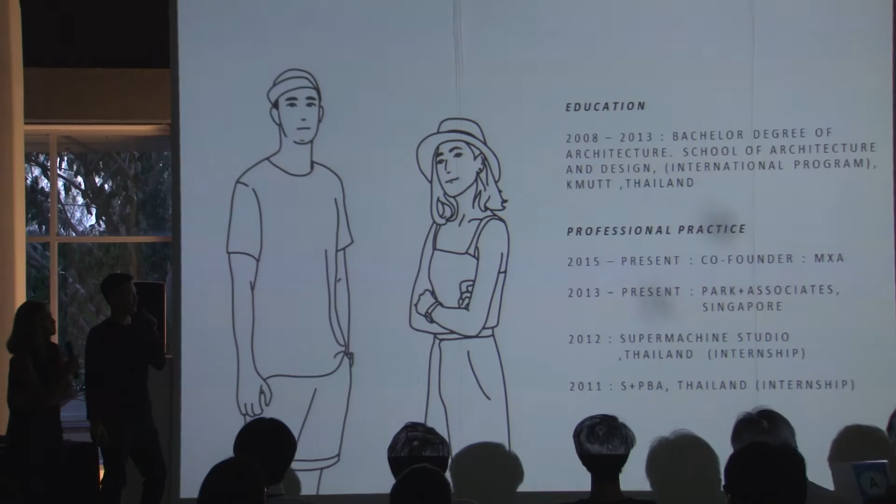There are two main topics that we're going to talk about. The first part is what we were doing when we were students, and the second part is after we graduated from the university. So for our professional experience, when we were third year students, we had a chance to do an internship at S+PBA, and when we were fourth year students, we also did an internship at the Supermachine Studio in Bangkok, Thailand. After we graduated from the university, we immediately started working in Singapore, which is an international environment.

We also had a chance to do various types of buildings, such as residential projects, commercial and mixed-use projects, master plans, and especially competition projects. This is our achievements while we were students. Since 2010, we won a lot of competitions and had some publications, in Thai magazines as well as international magazines and some books.

This is the story we would like to share about what we did in class at SoA+D before we got the job in Singapore. Every studio project has a goal and criteria that students need to achieve, so we set our goal to the highest standard. The result of each project was quite successful. For example, when we were third year students, there was a midterm project and an internal competition. I got the first prize, and we got the second prize of the studio project.

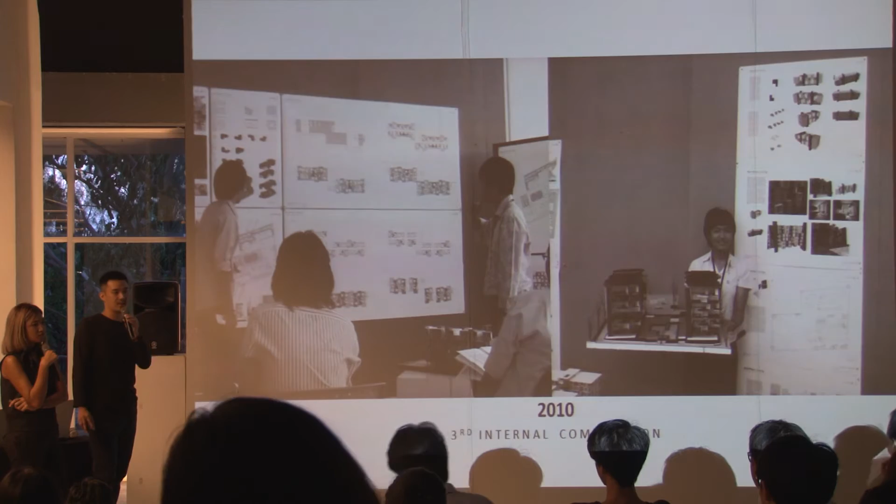After that we wanted to know what standard we were at, so we wanted to compare ourselves to other universities. We formed a team to do competitions, not just me and Mix, but P Boom as well, the three of us, doing competitions after class. We always thought, if we are top students in the class, how about students at other universities? What is the standard? The only way we could prove it was to do competitions.

So we think beyond that. Competition is the way we meet other people outside the university, so it opened up the opportunity to see other works. Most of my friends said the studio project is very hard work with no time. But during this period, after class, we also formed the team to do competitions, meaning we had no weekends and no school breaks as well.

We started with the Green Innovative House competition, organized by B1 magazine. This competition is a student competition. We needed to think about how to create a green innovative house in a different way, instead of only designing a green roof and planting trees and saying it's green. We didn't want to do it that way; we wanted to explore another direction. This is the first inspiration: the relation between two biological species, a buffalo and a bird. We wanted to capture this kind of relation and adapt it to our design.

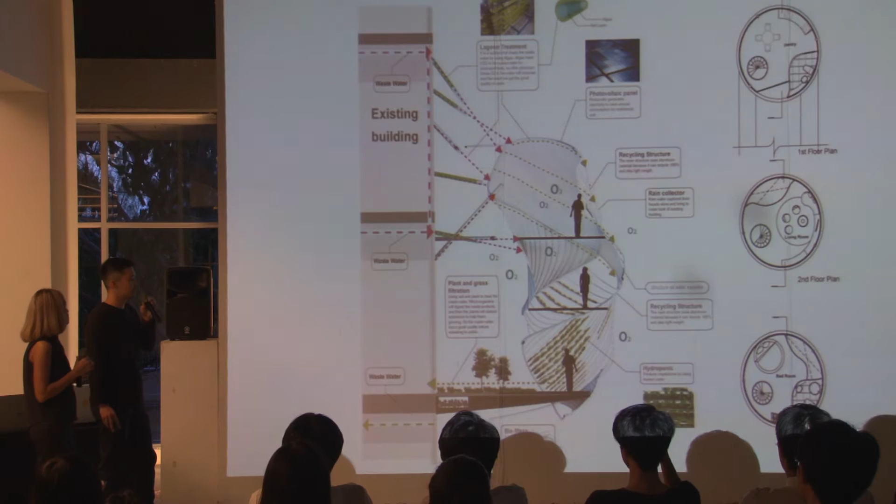Then as you can see, based on our research, in the urban scale, one unit of our design can treat about 500 liters of water per day, and also produce oxygen. So if we have 100 units, we can achieve water treatment of about 50,000 liters per day. So this is the urban scale, and this is our outcome.

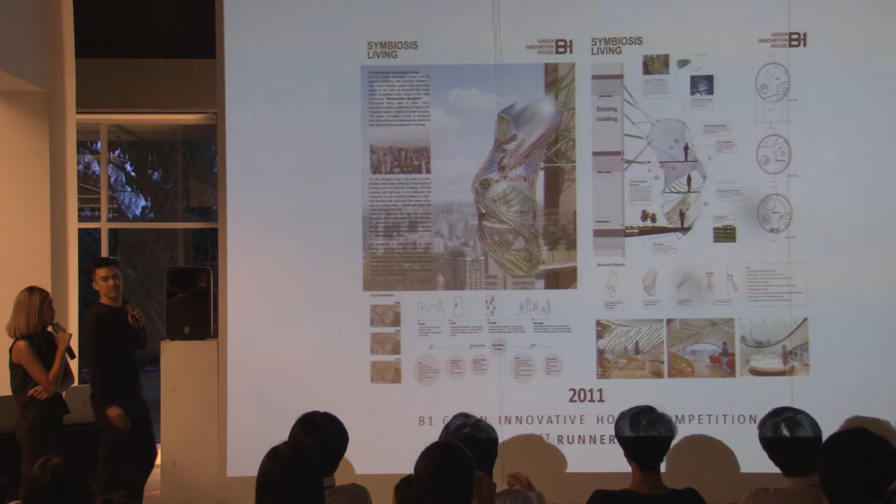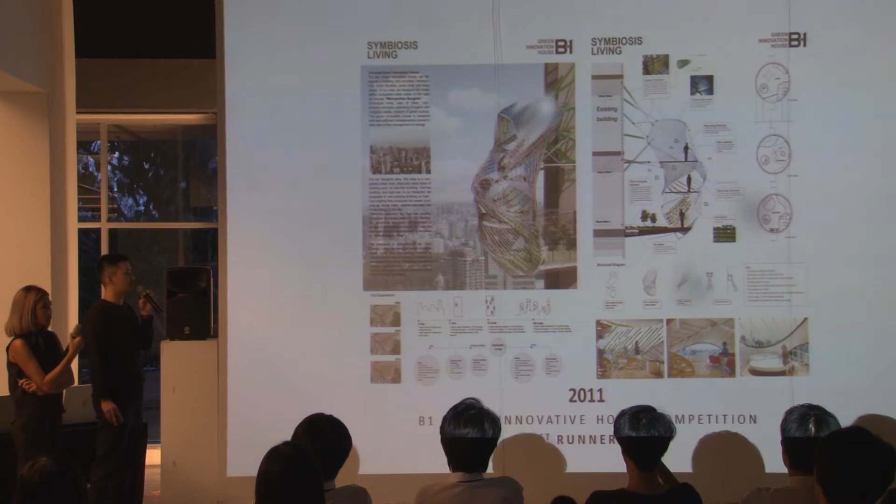This is the final project we did when we were third year students. You can see this is the final presentation that we submitted, and we got the first runner-up for this competition. This competition is kind of like a small step that really motivated us to develop ourselves.

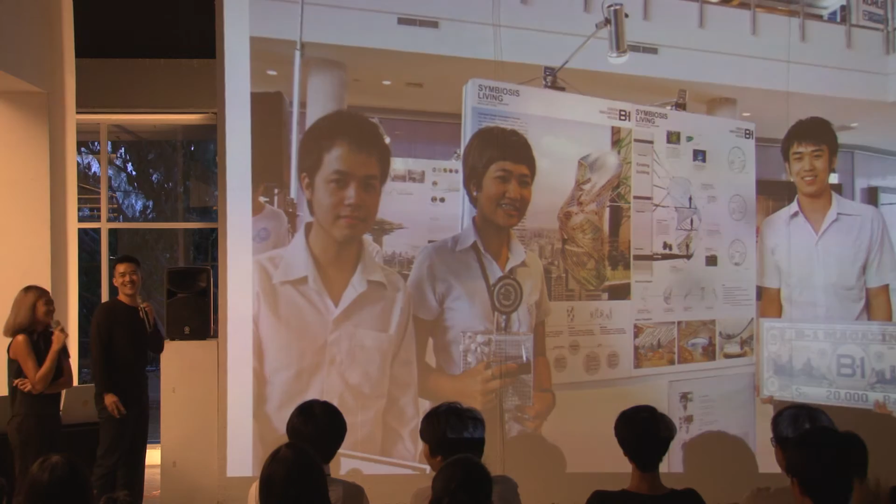Then the next step, we tried to join an open competition, which means it's not only for students. As you know, there is the flood crisis in Thailand. The topic is about how to live with unstable delta conditions. So this is the starting point.

We tried to study the mangrove structure and how the mangrove roots adapt to the unstable water level. So we tried to use this kind of structure to develop our own structure with the whole system of the community scale. We not only studied the structure, but the ecological system as well. And we also did massing models to test our structure and think about the unit.

So this is the outcome of the whole community scale. This is the linkage between the hubs of the system, so the circulation of each unit will not fail, and they connect together. As you can see, during the flooding crisis the circulation is disconnected. So we try to maintain it as much as possible by creating new circulation to connect all of the community and keep the character of the city.

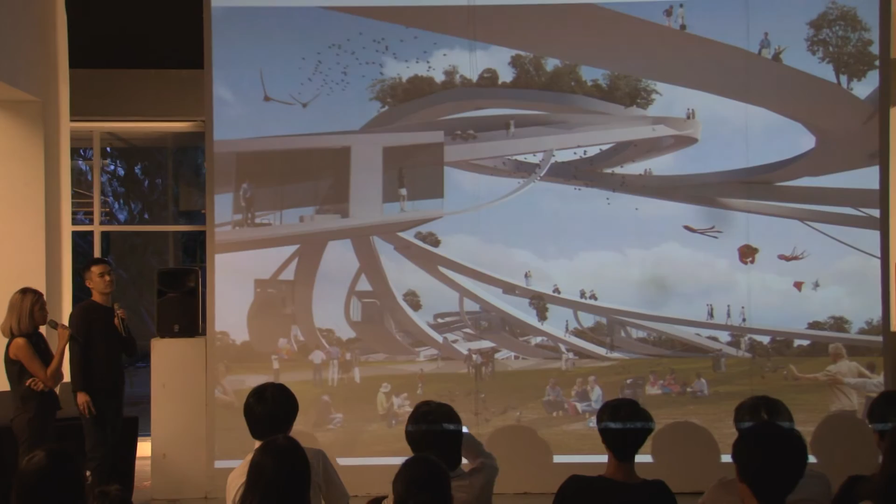So this is the normal situation. People can use the space under the whole structure as a public space, and after the flood comes, the whole activity is still there. The connection will not go away. And when the floods come again, you can see the activity. We try to maintain all the circulation and activity, so the structure can be like a pier, meaning by boat we can keep the circulation.

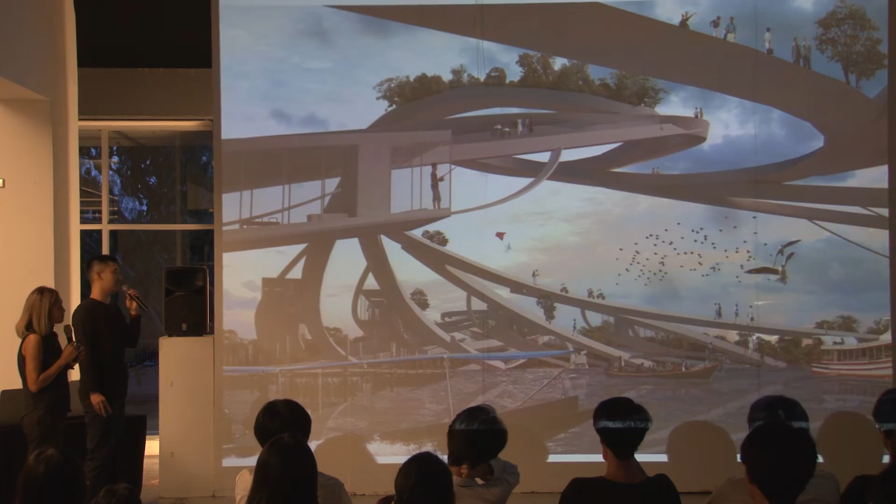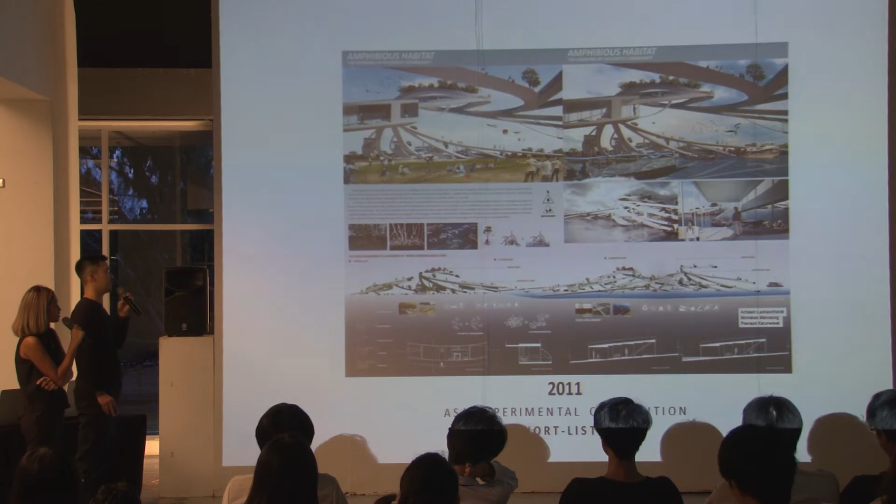This is the final presentation, and this one got shortlisted this year. This is the way we installed our work in the ASA exhibition. So this is the rest of the competitions we spent time on during our study. Some we did not succeed in and did not get a prize, but we got a lot of experience doing the competitions.

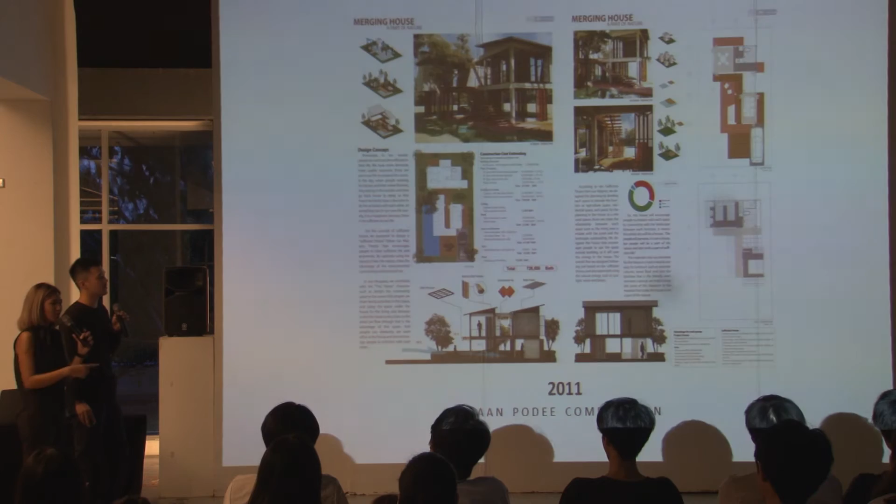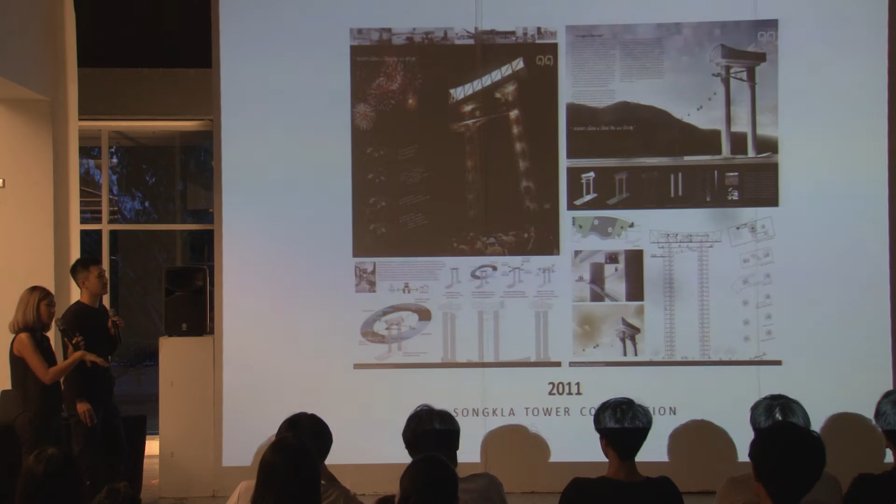This is the Baan Podee competition. We got only 5 days for this whole project. And this is more of a professional scale, because whoever wins this project can build the design. And this is another year of the ASA experimental exhibition, and more open, for the international competition.

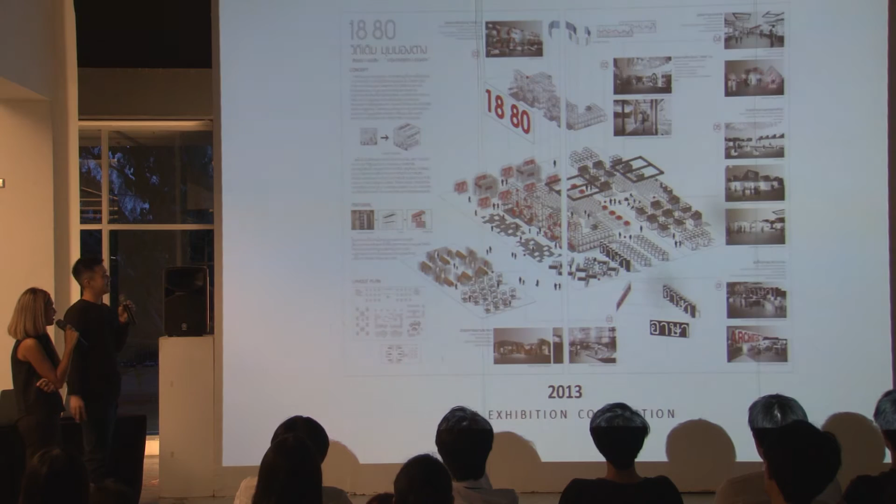We joined the Evolo Skyscraper competition. We needed to pay money to join, but we tried, while doing the thesis. Yes. And this one is the ASA exhibition, but there was no judging that year.

And then this is the overall achievement. Some of our work was published in Thai magazines, and some was published internationally, in a book and magazines from Canada and Korea. So it really motivated us. So that is our first edition.

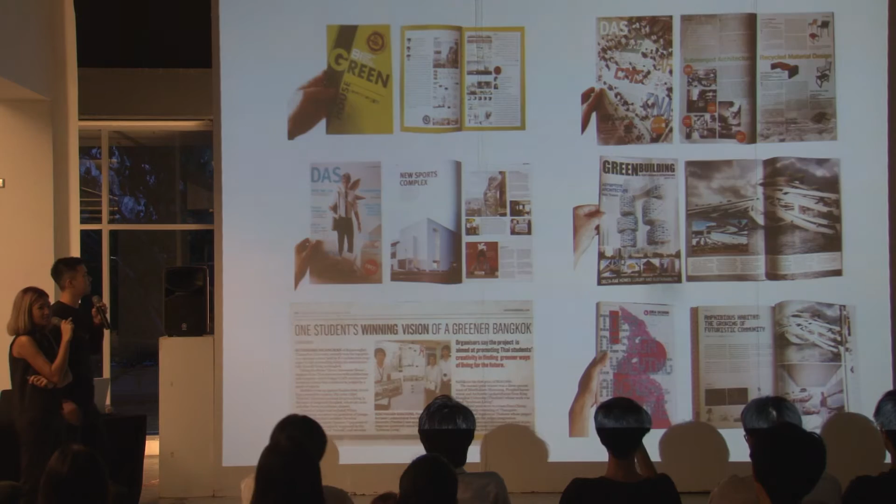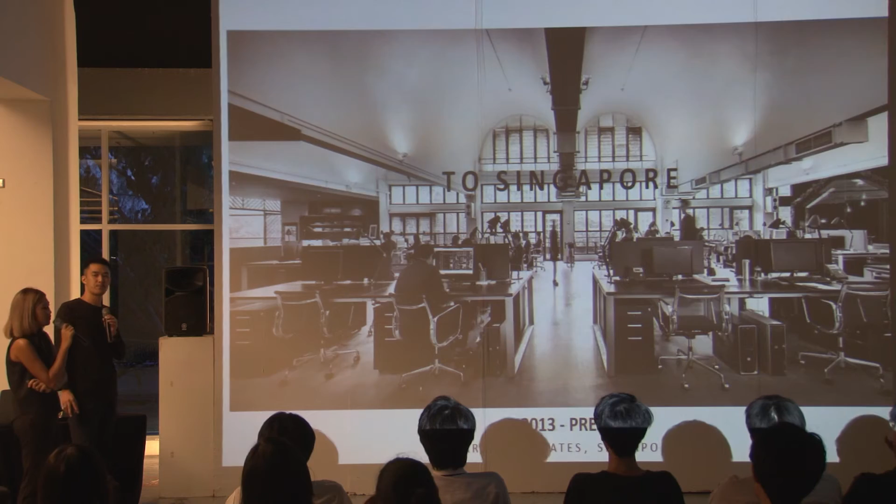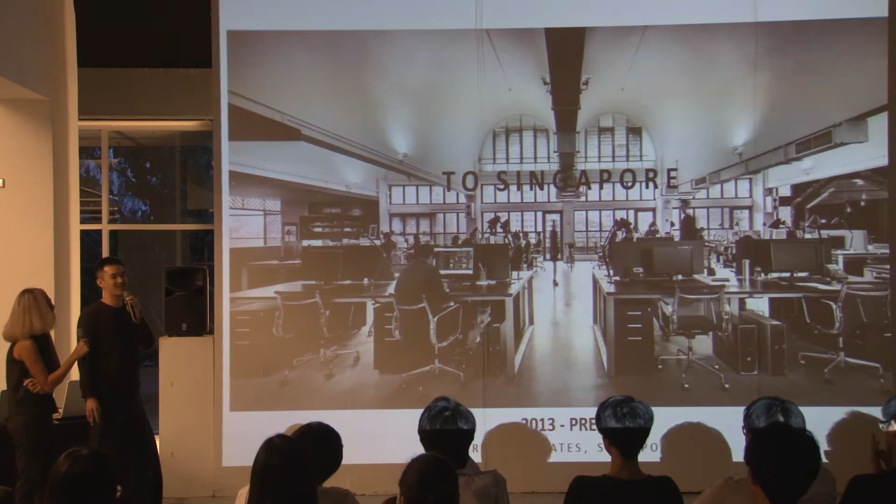So after we graduated, we got a job in Singapore. Actually, we sent the portfolio during the thesis. Our portfolio, we were the only ones who printed and sent a hard copy. And we got a job in the same firm. Yeah, really lucky, internship, yes, same firm. So we work at Park Associates since

2013 until now. And then it's kind of a big change, because you need to learn again. It's like being a first year student again after you graduated. Everything is new for us. This project is the first project I had the chance to do. It's a semi-detached house.

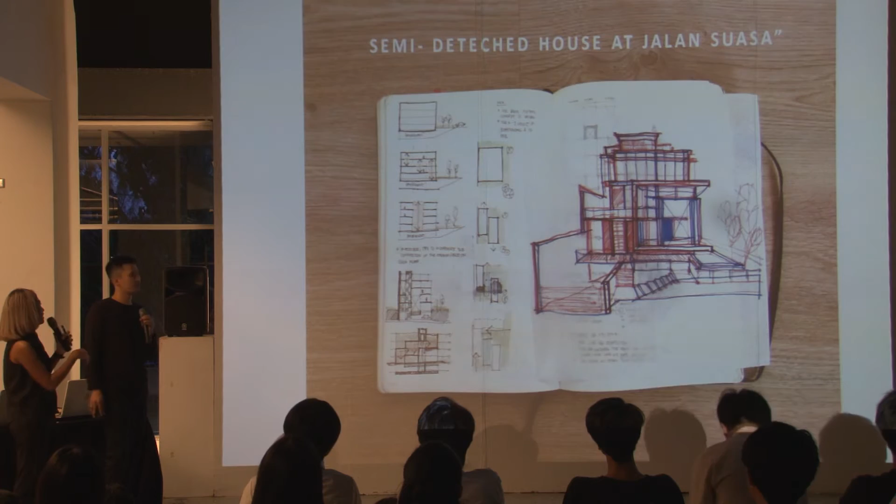Generally the semi-detached is like a twin house. You might share one wall together with the neighbor. So the brief from the client was they don't want this house to look like a semi-detached house. So the idea is we might try to make the house more detached from the wall. So I try to insert the green space between the wall and the main house.

And because the client is a really big family, I would like to create a common space where everyone in the house can gather together. So it allows me to create a living space that has a double volume, and at the same time the living space can interact with the swimming pool as well as the dining area. So it's not only expressed in the form, but the plan as well.

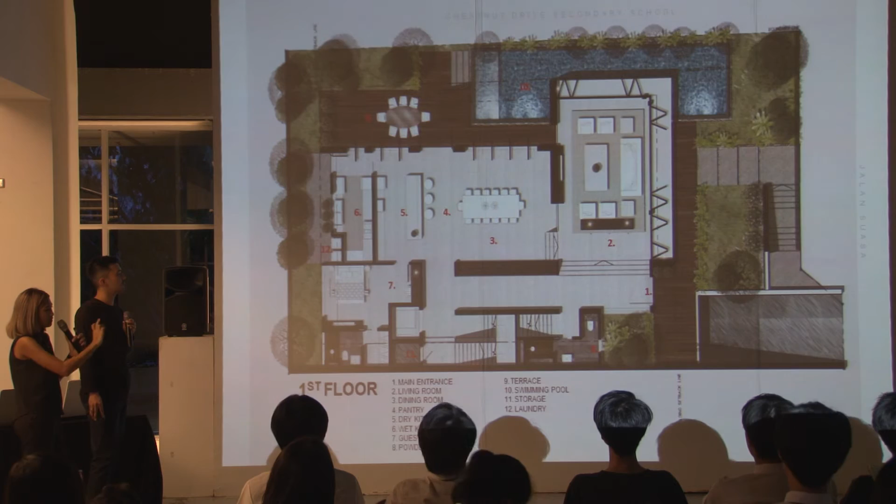So this one is thinking about the relationship between the function inside as well as the experience when you enter the house. You don't just go directly into the house, but you might walk through the garden first. And because the living room stands out from the plan, it gives more meaning to how you express the common area that is very important in the house.

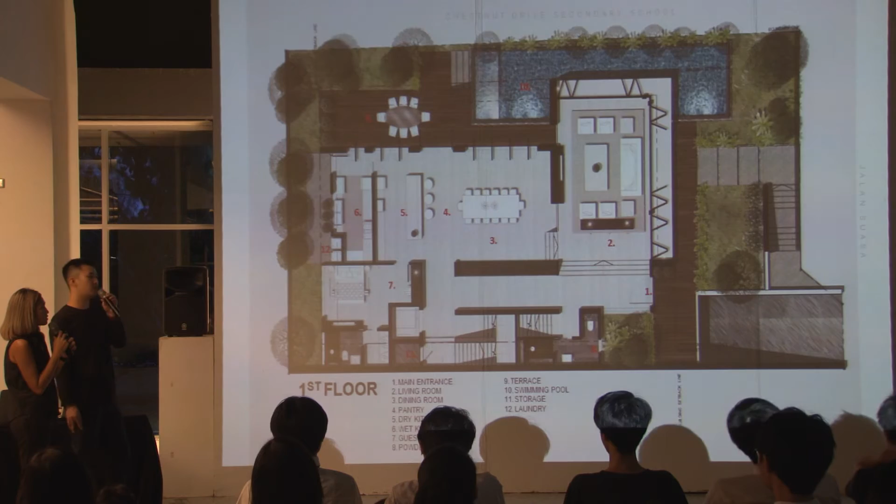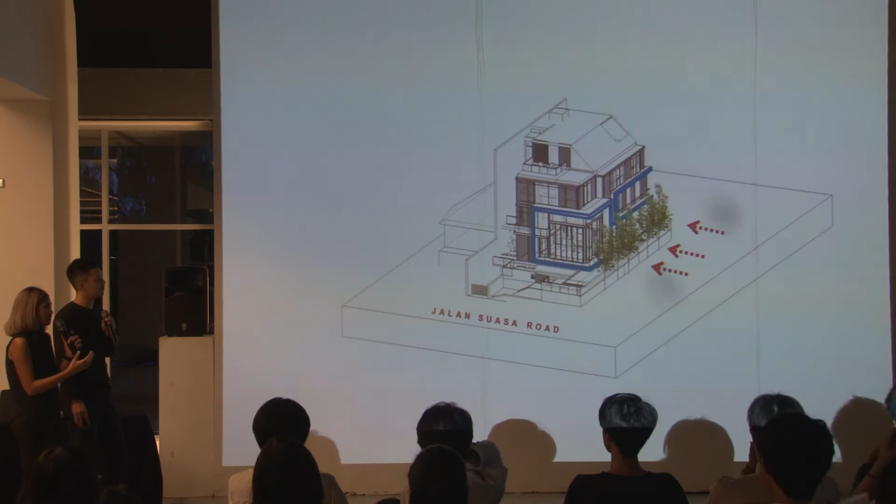And also the circulation, as you see, if you don't want to walk past the living or dining, you can go directly to the staircase to go to your bedroom directly. And this is a diagram that shows how I locate the living space facing north. And because to the north there is the school with the neighbor, you might keep the privacy with some trees for the clients.

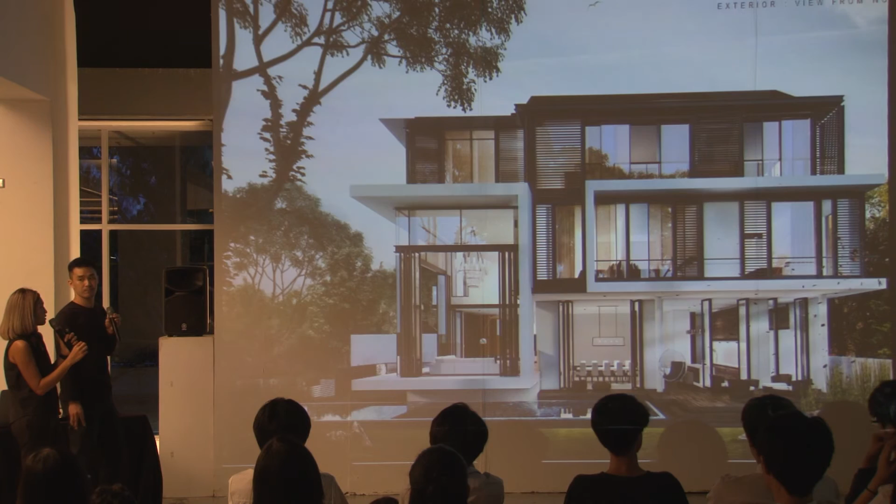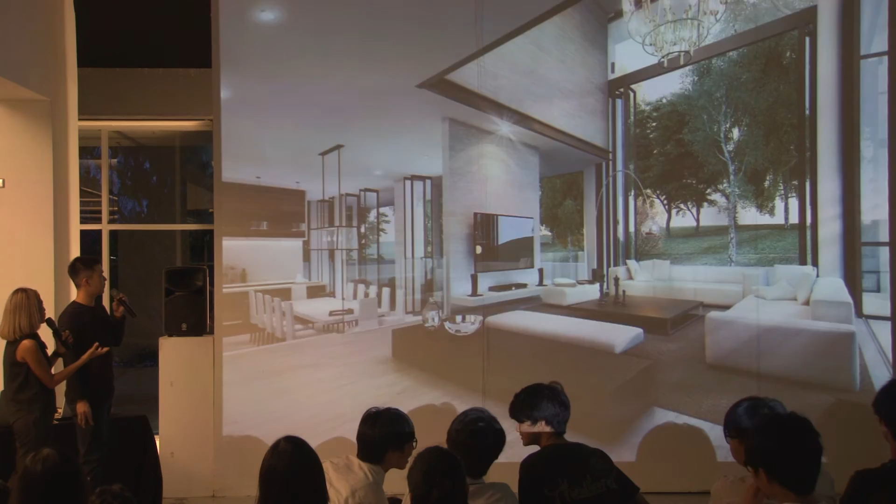And this is the elevation for the site. This is the perspective from the main road to the house. And this one is the actual site. It's built up and will be complete next month. This one shows the living space related to the dining area as well as the swimming pool down there. And for the actual space, it's quite the same as what you thought before the design was built.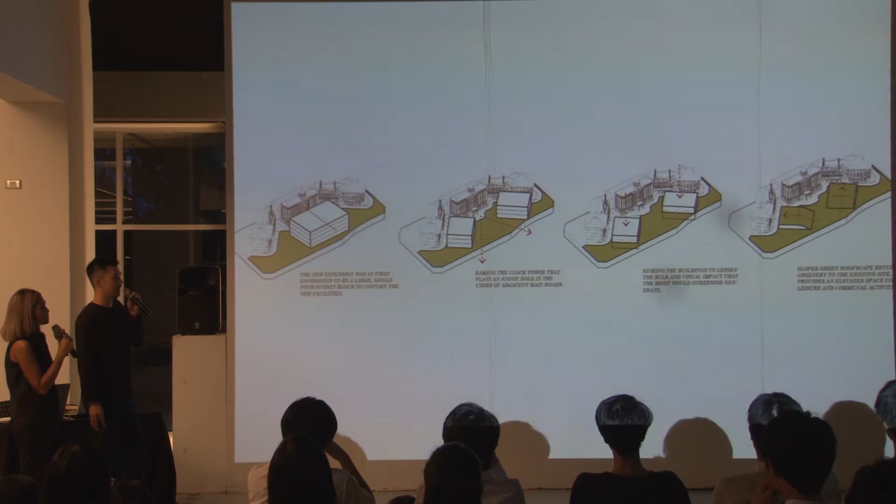So we don't follow their brief. We try to separate it into two blocks to reduce the mass, and then we sink it down one and a half stories into the ground, and then try to continue the existing green onto our green roof. Meaning we can keep the activity and also achieve the visual perception.

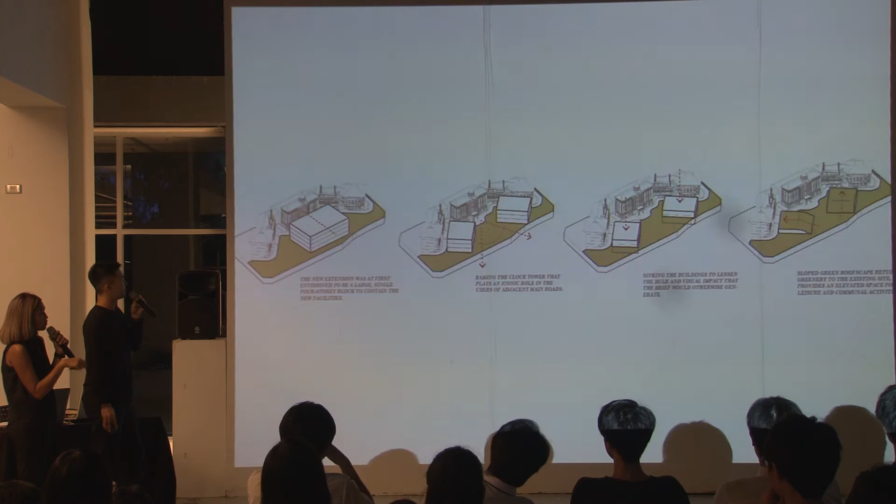This project was quite challenging for our firm because our boss dared to send this scheme to the client even though it doesn't follow the brief 100%. Normally we would not send this schematic design to the client because it's not what they want, but we proposed a new way. Finally, we won this competition because we were the only one different from the others.

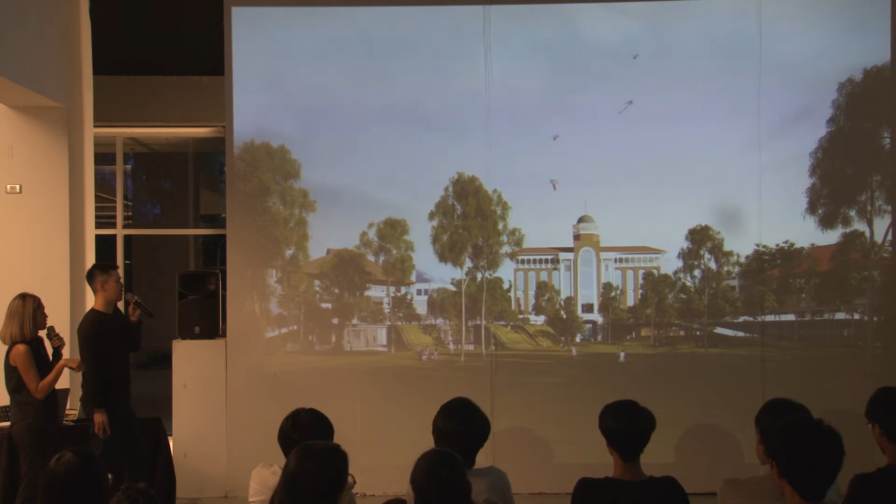Then we try to sketch to see the relation, and when you see from the roof plan, it's completely clean, the same as the existing one. And in terms of the visual perception, people can obviously see the existing behind, because we need to respect the site. Just a small change in size.

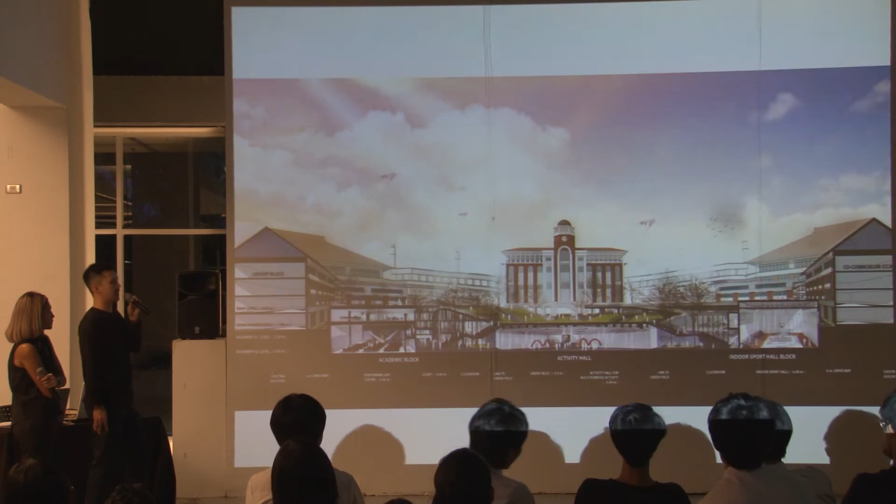So this is the facade design. We designed louvers here for ventilation, which is quite important because we sank down the whole building, so the air needs to go down through. And then you see the relation between the existing and the new one.

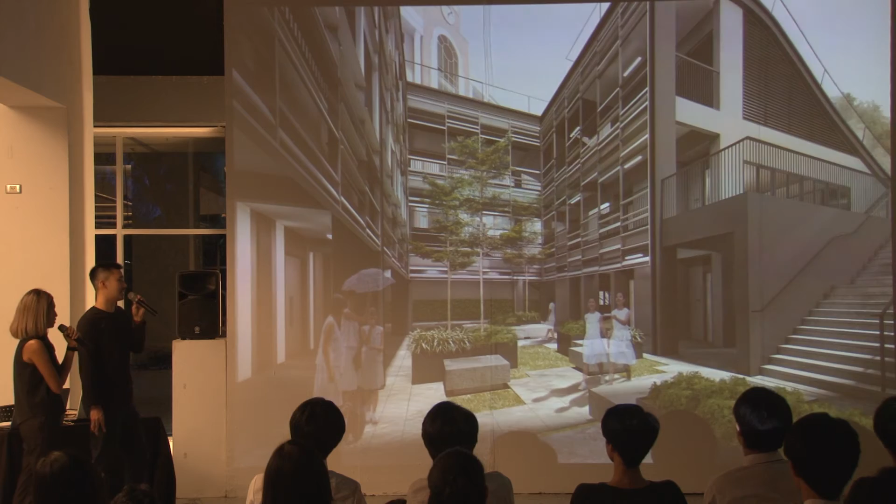And this is the center court. So we tried to create a court to allow the lighting, the sunlight, to come into the court. And it's almost finished by the end of this year.

Yeah. So as you see our development, at first when we were students, the competition was more very conceptual and unbuilt for sure. They don't want to build, it's just an idea competition. But in reality, when you do the competition and then you win, you need to build it, and try to keep the concept that you think of.

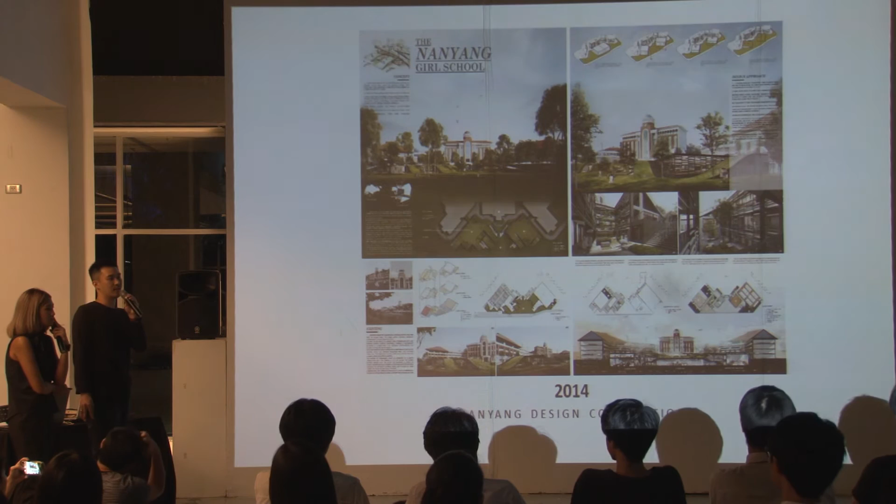Yeah. Personally, I think this project changed our firm quite a lot, because normally our firm is focused on safe schemes, formal ones and more commercial. But this one changed the vision of the firm. This is the final presentation board. We submitted only A1, two boards only, for the first stage.

This is another house, but it's a different type from the first house I presented before. This one is a Good Class Bungalow, which is the biggest type of house in Singapore. The client just gave a little of the brief to us, so the boss allowed me to experiment a lot in terms of the programming of the house. So I tried to bring a new method of thinking about the space inside.

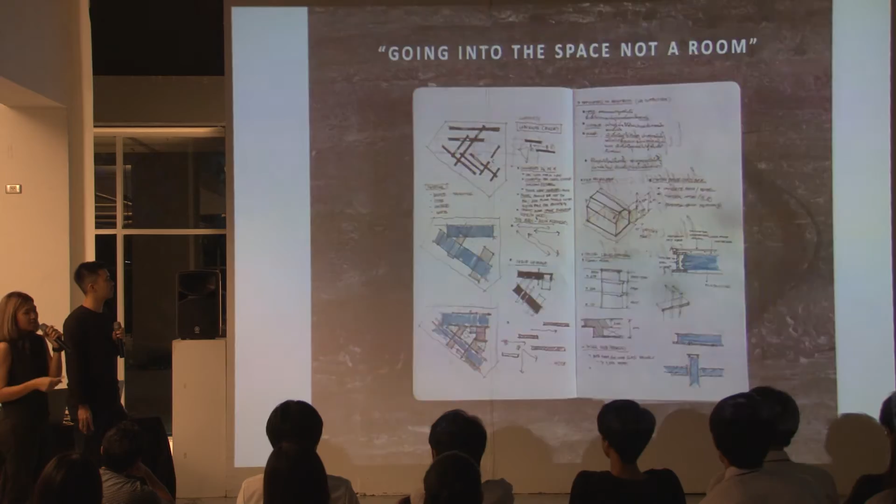Normally when you're doing a house, right, you do the box and represent this box to be the living room, the dining room, something like that, right? But this one, I thought the other way. This is the existing site, which is the corner. So I tried to think about the sequence. You walk through the house first, and then divide the main massing into two sides, the back one and the front one here.

And I created all the space only by walls, like partition walls, not boxes. So the box is just the outline. Then we inserted partition walls to create visual perception, because some of the programs need more privacy. That's the good condition of how we build the wall like this. The wall can hide some parts and show in other directions. So you hide something if you don't want to see it, but you show a lot if you want to focus.

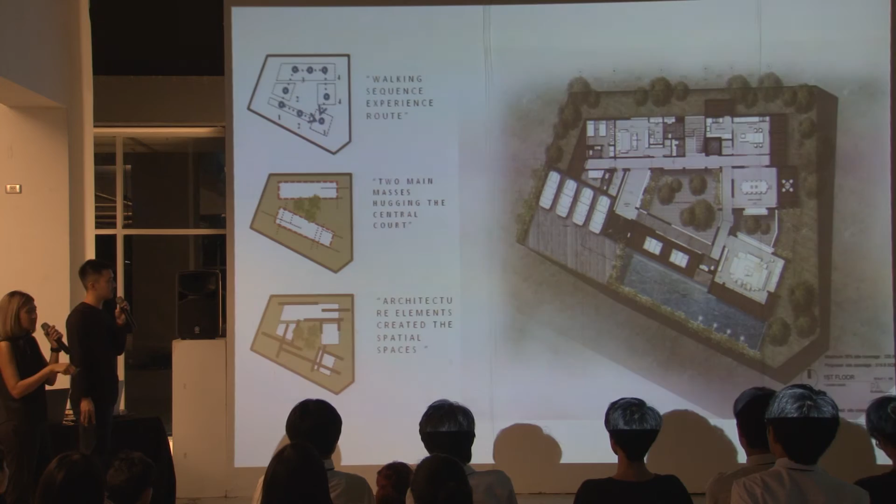Yeah, this is the relationship through the sections. The heart of the project is the court at the center, and this court changes the experience when you walk from one space to another across this garden. And you can see the space is, we can say, semi-outdoor. You cannot tell whether this one is inside or outside.

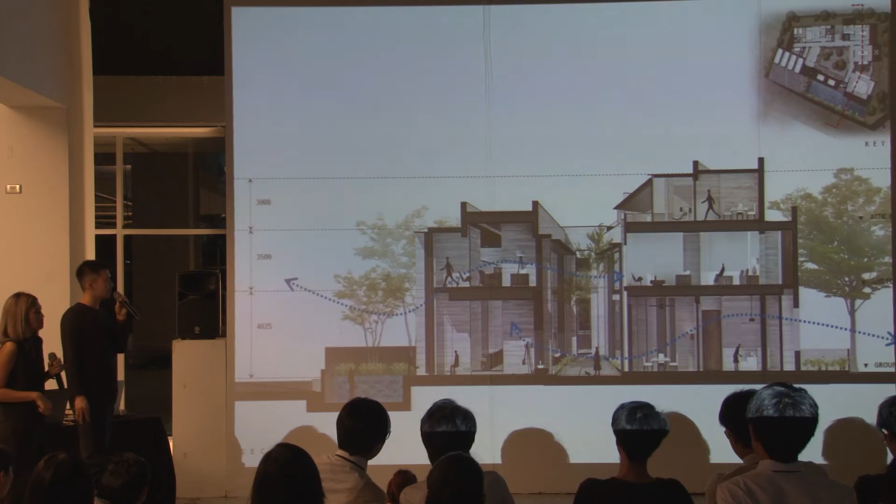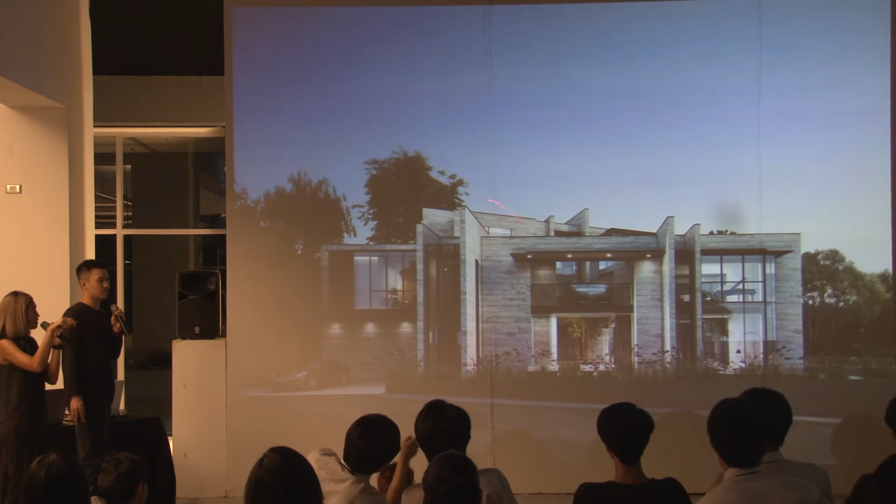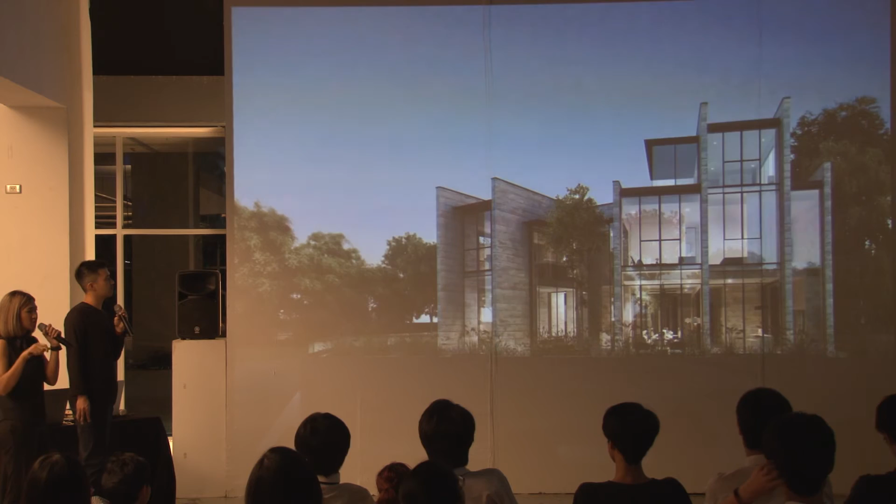This is the final presentation. So this one is almost inside already, but actually it's open wide to the outside. And we keep some privacy with another wall here. So the client was quite happy with the solution. So totally no more boxes for the house, just planes. And this is a perspective from the internal court and the linkage between the two blocks, the front and the back. Also, this one is open-air space.

And I like this photo so much because this one is almost exterior, but it's the main circulation where you walk from the entrance here to the living room. So you walk through the garden first.

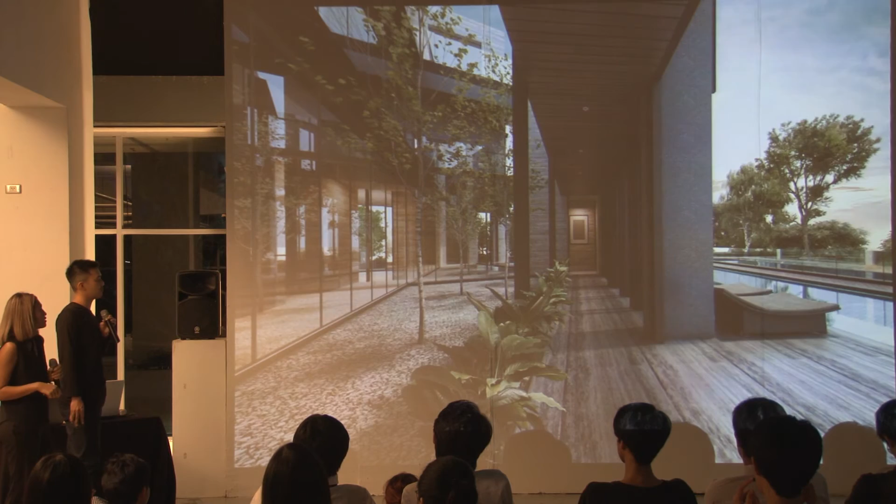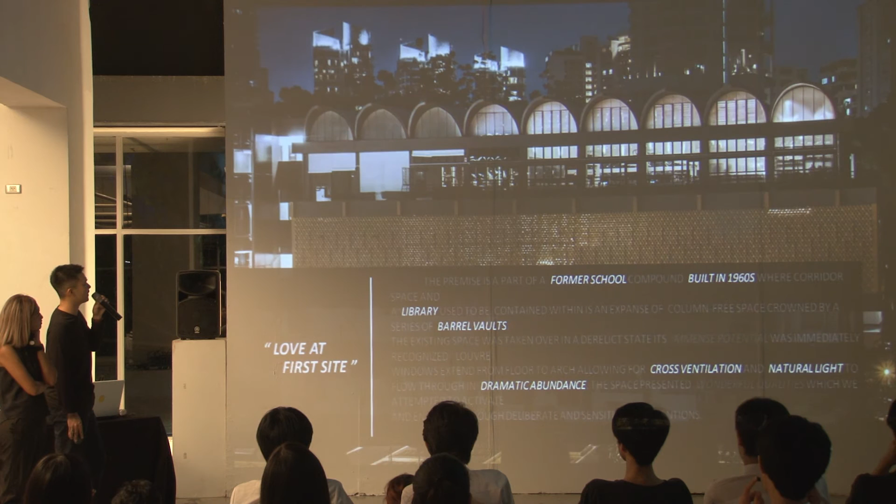And then another one is our office in Singapore. Yes, our office. So basically the existing site is a school, and our space is on the top of the building. As you can see, there is a barrel vault, something like an arch inside to take a long span. So our space has no column at the center. Then, this one used to be the library before.

And you can see the condition of the site. Then the idea: we don't want to create a boring office that separates people to work individually, with no connection, no interaction between each other. So the existing one is in the above image, and our design is the below one.

As you can see, the main entrance on the left is a triple volume, and then we close it at the transition space. Here is the cafe, the multi-purpose area, and our working space is a double volume space. So we try to create a dynamic sequence from this space, walking through this and going to another one.

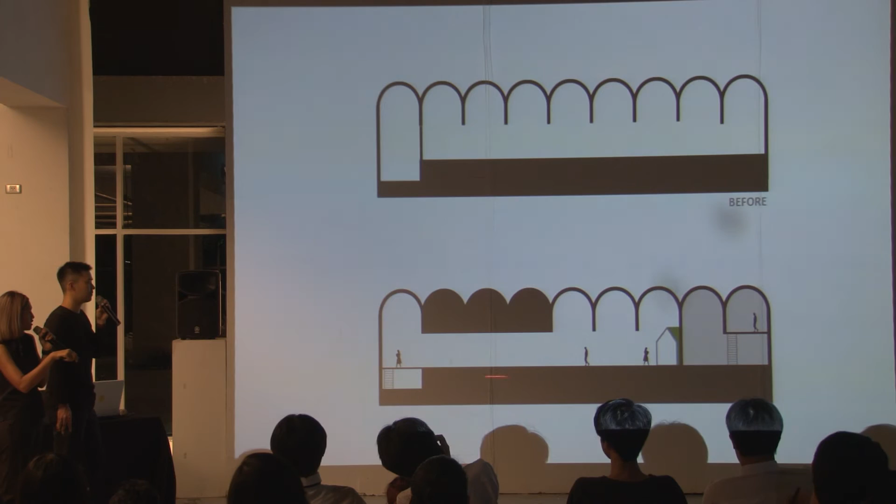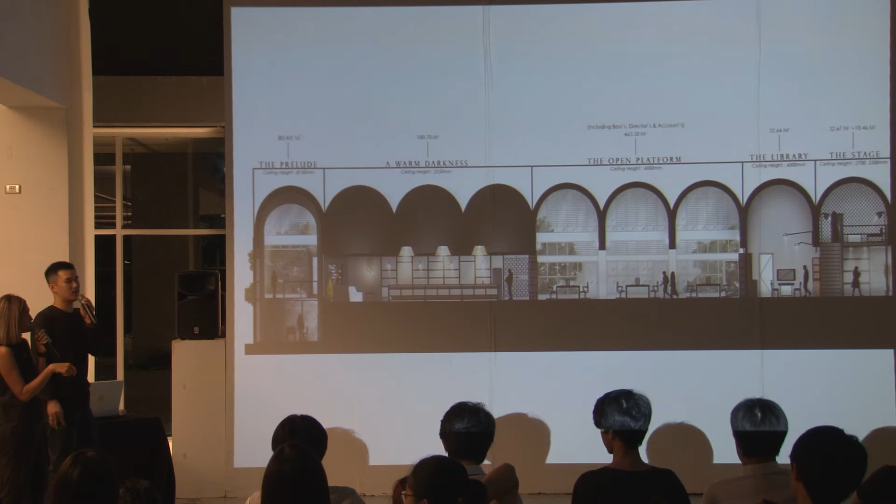Then this is the final section. You can see we try to create a sense of arrival by creating the triple volume here, and then you need to walk past the cafe, a relaxed space, before you work. So we try to create a sequence and a story. On the plan there are two entrances, here and here, but with both of them people have to walk past the cafe before they go to their desk or table.

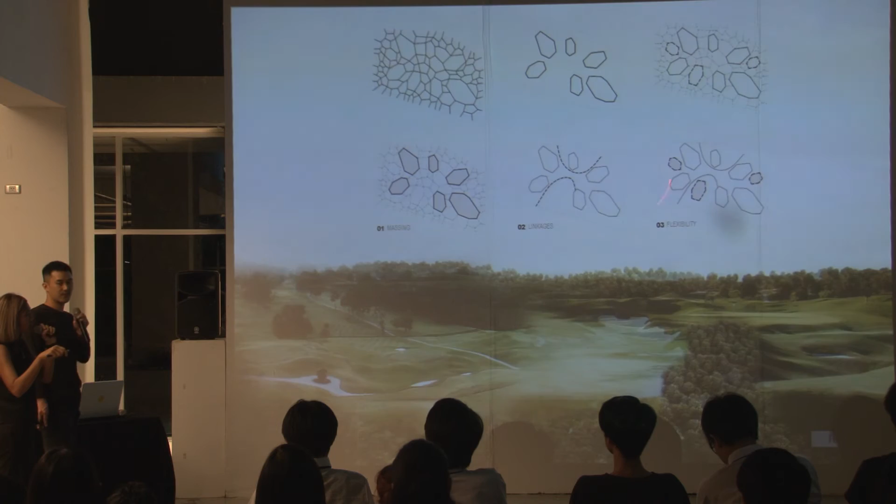This is quite a big project for our firm. We intended to join this competition for SICC, Singapore Island Country Club, doing the clubhouse. This one comes from the Voronoi structure, which can continue going and cannot stop. So we try to adapt this idea to create individual pods, and after that we link every pod together with this linkage. So if the client wants to expand the project, they can use the same Voronoi language. So it's quite flexible.

So this is the final outcome of the design solutions for the clubhouse. The north part faces the golf field, and the south part faces the forest. So we would like to block the existing building at 90 degrees here, and open the rest wide to the forest. So the direction of the plot has meaning. That's why they face this side.

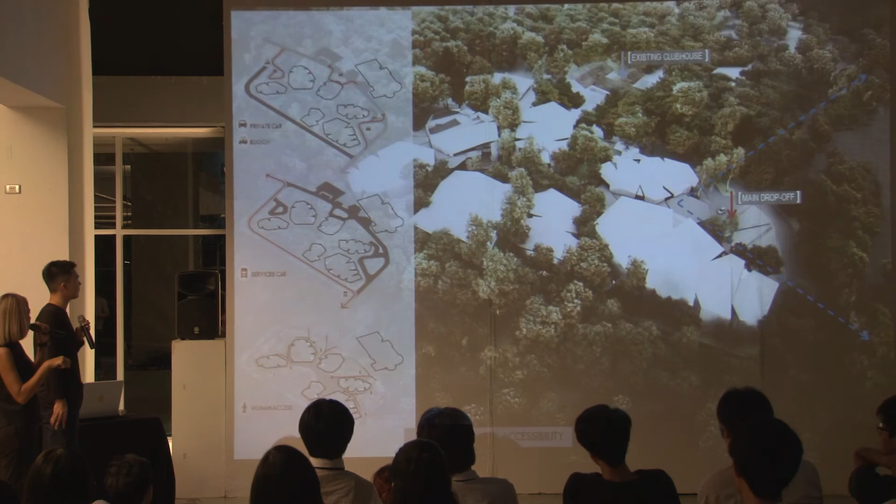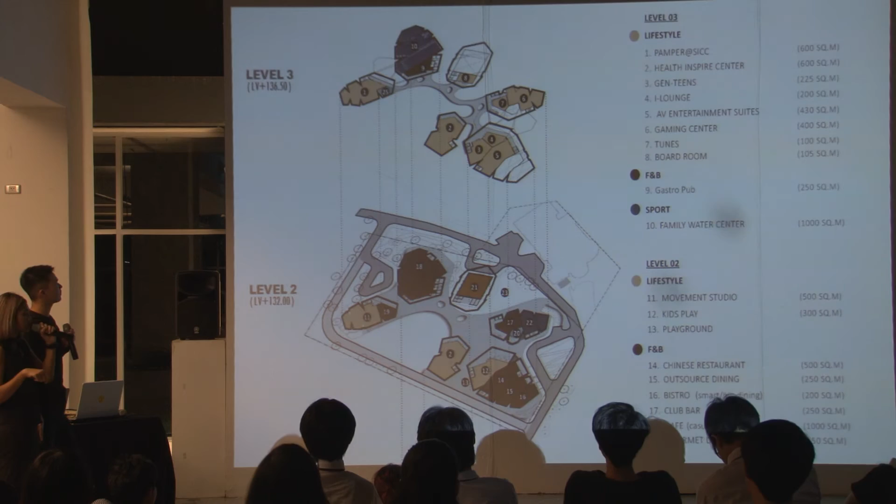And this is the circulation of the whole project. This is the main entrance, which faces the golf field here. They have 2 drop-offs, private car and buggy drop-off. This direction is the service car road here, and this is for pedestrians. This is the zoning plan. We have 4 stories, including the basement. The basement is here.

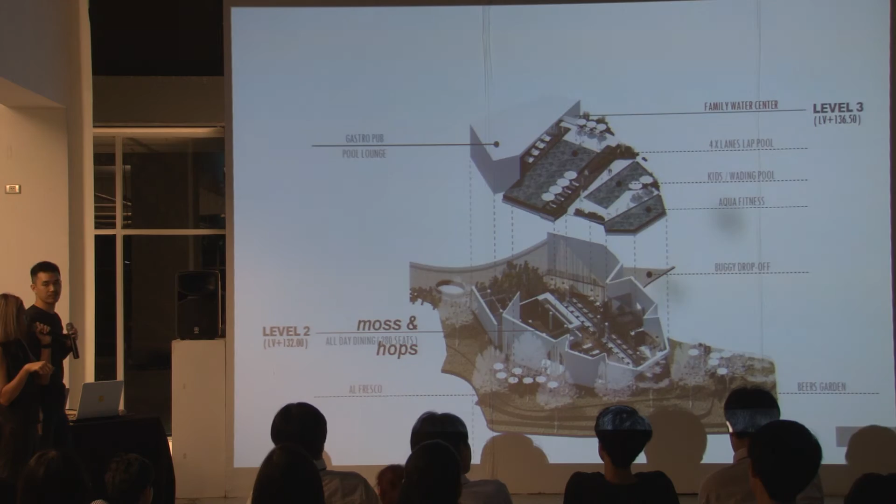And this one shows one of the individual pods, the relationship between the functions: the swimming pool, which is used all the time, we try to keep together with the all-day dining area. And underneath there are the service rooms, which are the locker room and the restroom, and the car park below.

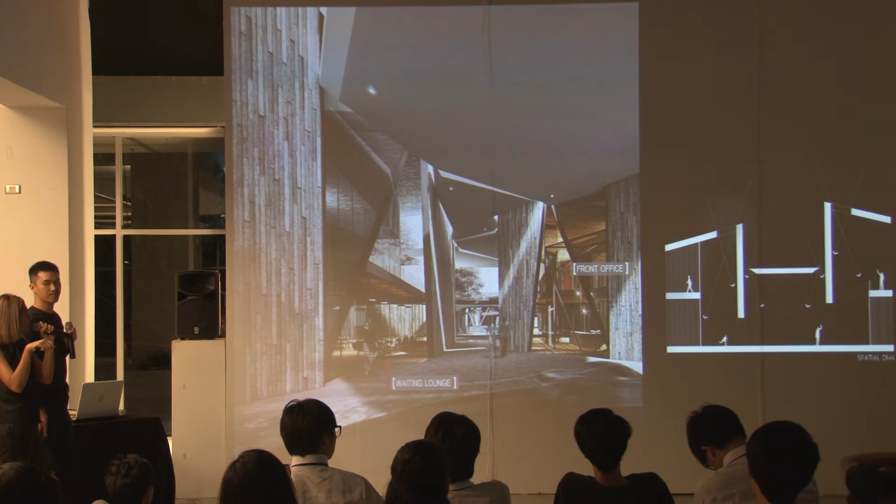And this is the relationship between the spaces, semi-outdoor and indoor, and the circulation, the double volume. This is the main entrance, so we allow some natural light to come down. And this shows the elevations. Sorry.

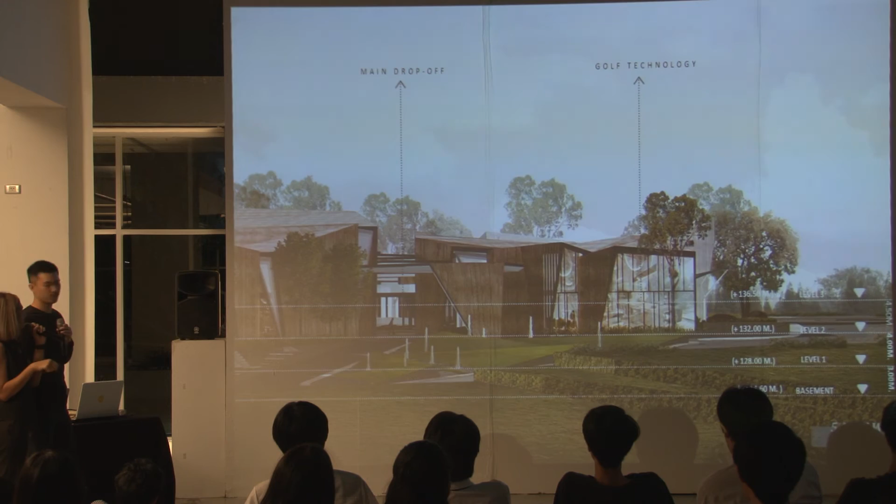Okay. Next one. There's a video to show you. This is the final presentation video to the clients. Because the project serves high-end people, it's quite expensive.

We spent 1 month designing this project, and another 3 weeks doing all the productions for the presentations.

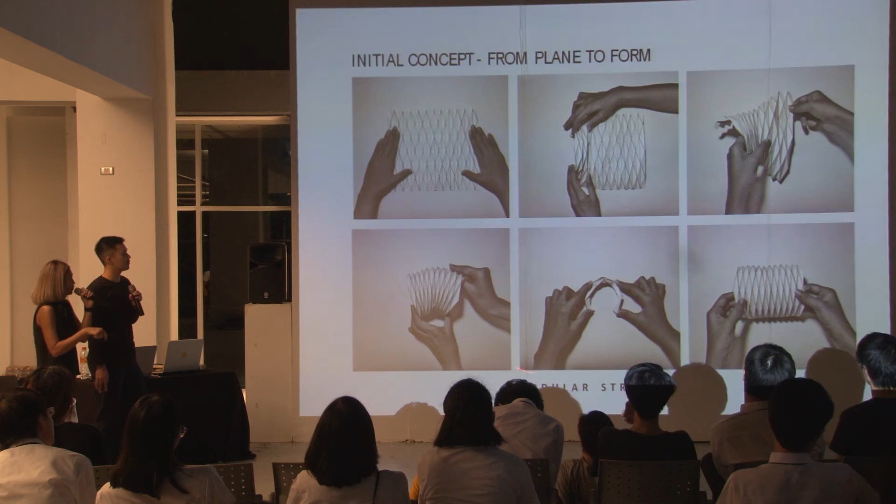So it's kind of modular. So meaning it can generate any kind of form. It's very flexible on the size. And this is the roof structure and how we fold it. And when we unfold, there will be one module like this. And this one is the separate platform structure, like a cake shape, so the platform will control the direction of the folding like a fabric.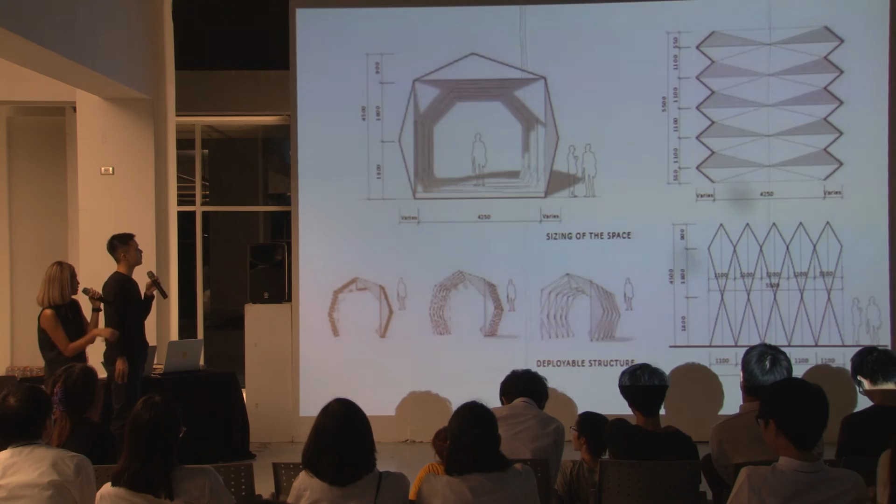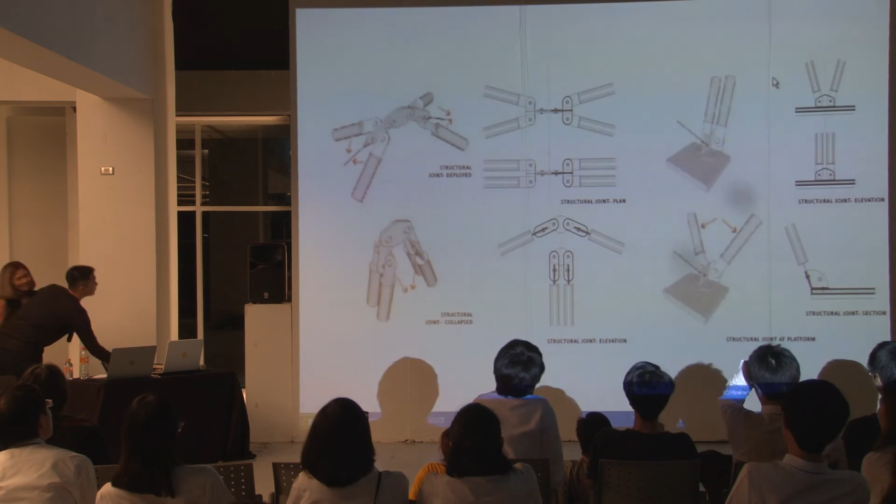This shows how the structure and the platform work together. And this is the structure design. We try to use the bamboo structure with some bolts of the steel structure together.

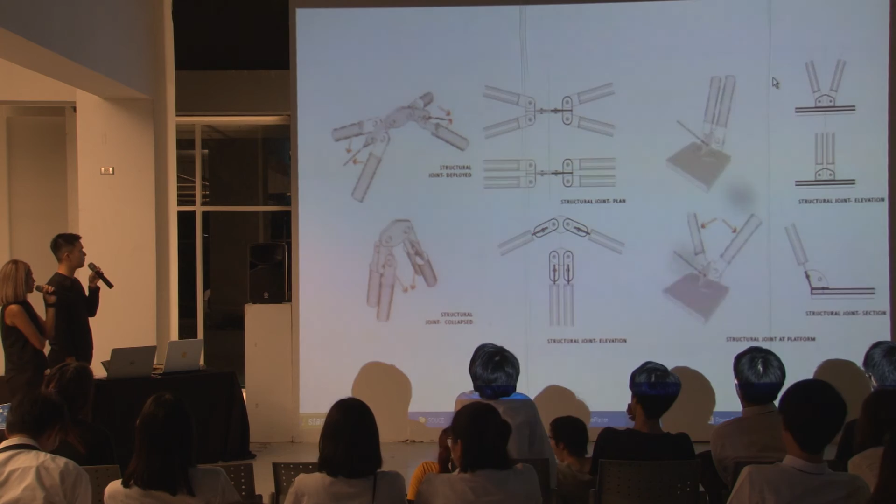And this is how we transport the whole design. Like this one, we install the platform first, and when the platform is finished, we install the roof, and after that we unfold it to be the pavilion. So as you can see, it's only 2 trucks. Yes, only 2 trucks. And this is how we can generate other forms, depending on the context the pavilion will be in.

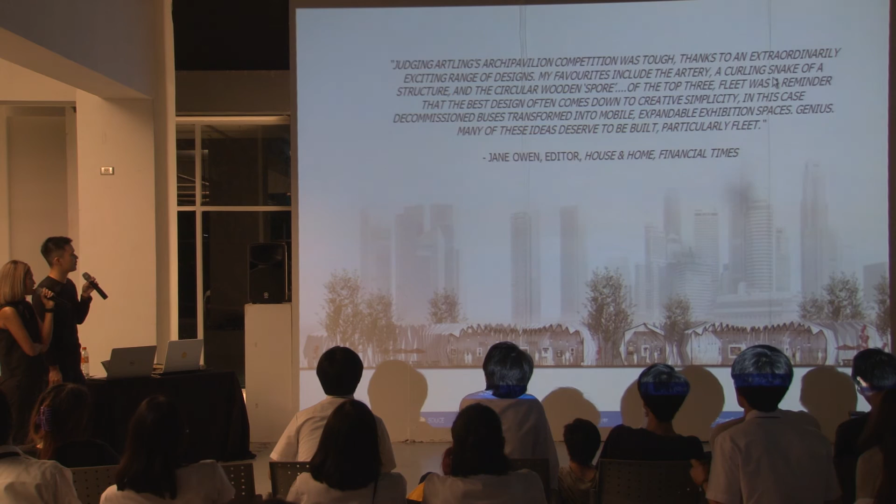For example, we can build it in Chinatown, and also let's say if we have a big space, it's kind of really flexible to move. So this is just some comments from the jury that they quite liked the design. And this is the final presentation, just 2 pages. This is the final presentation day. We got the honorable mention from David Adjaye.

This one is a really small scale design, but we had the chance to do it at manufacturing scale. So this is Project X from the Singapore art event. So in this one, we worked together with the manufacturer to develop the material. So actually, solid surface is normally used by architects. They use it for countertops; it has the property of seamless connection, and it has wide range for form creation. But the problem with this material is that it looks so fake to us and looks cheap.

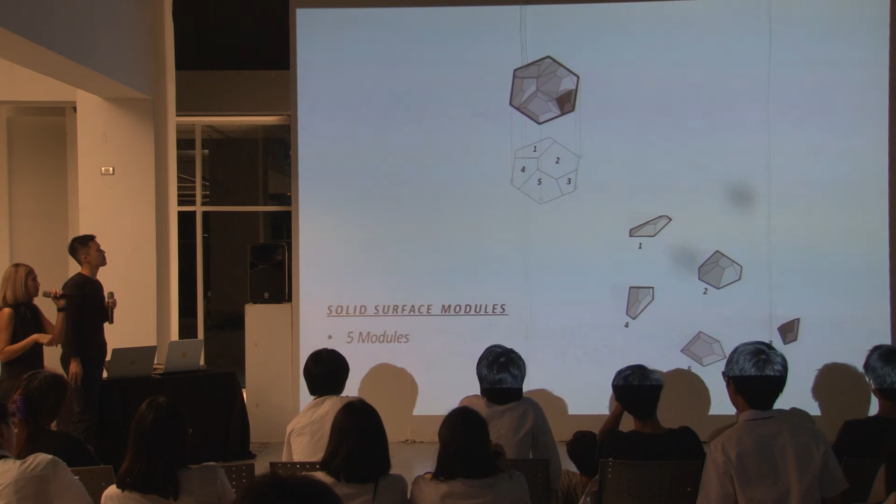So the way we want to develop this one is how we can provide texture for the solid surface. So we were thinking about how we develop the material, to put more texture on the surface. So we try to simplify it to a more pixelated scale, and this is the prototype for the next one. The prototype for how we try to make the material look random, but at the same time have some system behind it.

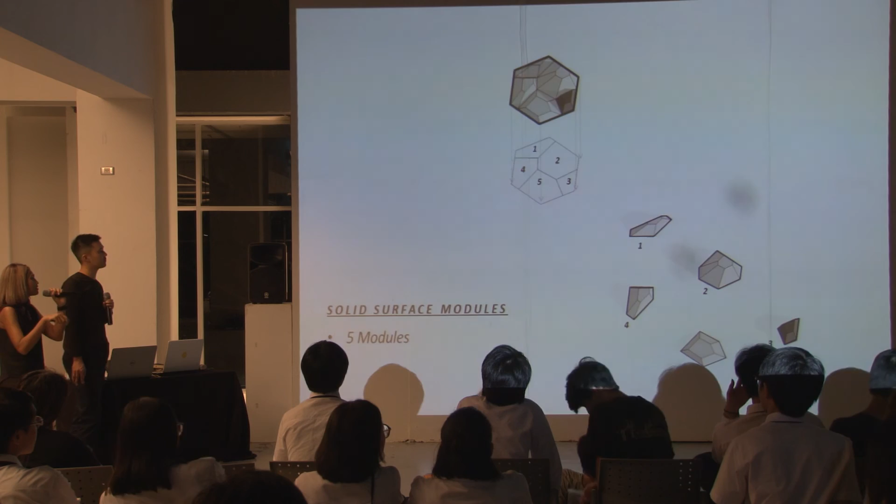So this is our proposal. We need to think about this material in terms of exhibition design, because this one is going to be shown in the art event. So we create the curve, so people can walk through and experience the surface. This is how they construct the main panel inside. And this is how we generate the different types and colors of the material. Normally it looks random, but it's based on the modular system.

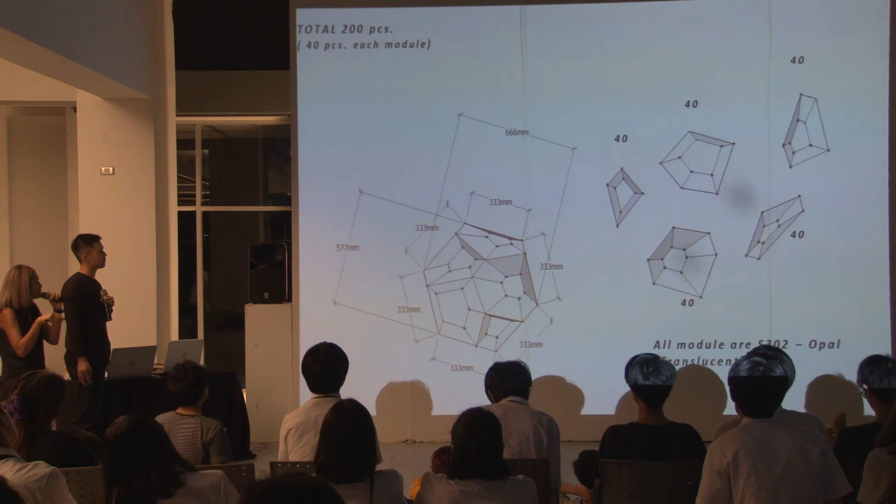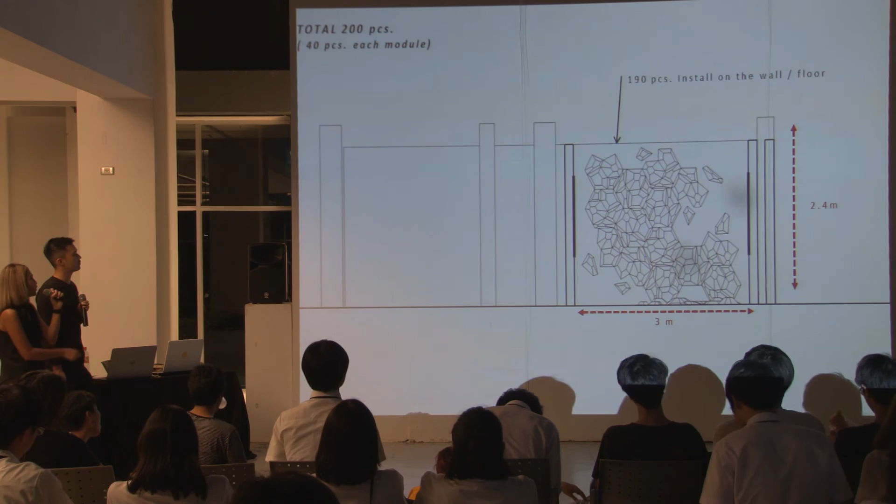So from this system, we might adapt this way for a more micro scale or the building facade scale, because everything is modular. So they have the system for themselves. But finally, we never built the curve we proposed; they allowed us only one wall for installing the art. Yeah, like this one. So this one is our final outcome, but actually people quite liked this one.

And I might show you some presentation video. Okay. Because the way they did PR for the event is really impressive for Singapore. They have a lot of budget for PR.

This is a way for us to take a step back, have a bit of fun, to look at things from an experimental perspective. So you can see that we work closely with the manufacturer to develop this material. We wanted to shift the focus internally to create a space where external distractions are minimized.

We want to adapt solid surface as a system, and we think that it can be applied at a variety of scales. In our installation, it's very much at a human scale. It's very close to you, you can touch it, you can see it closely. But then we also think that it can be applied at a macro scale, for example, on the facade of a building.

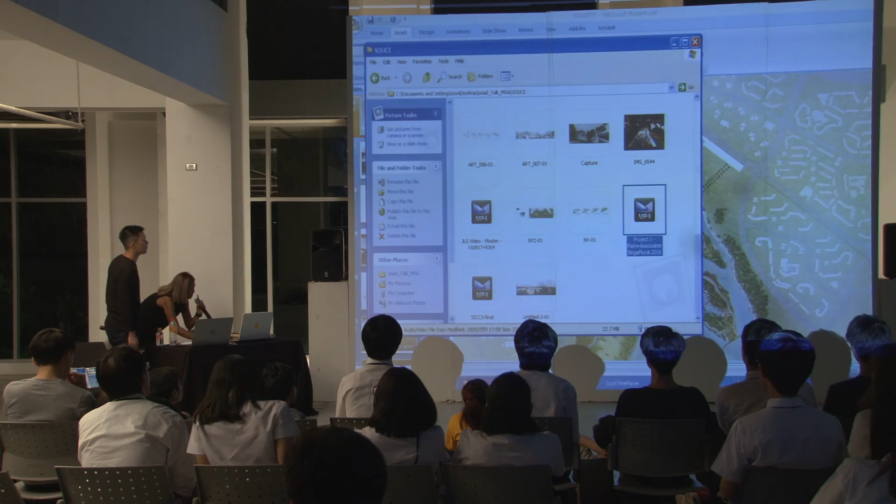That's the PR video. Okay, the last project we have got to show you is this one.

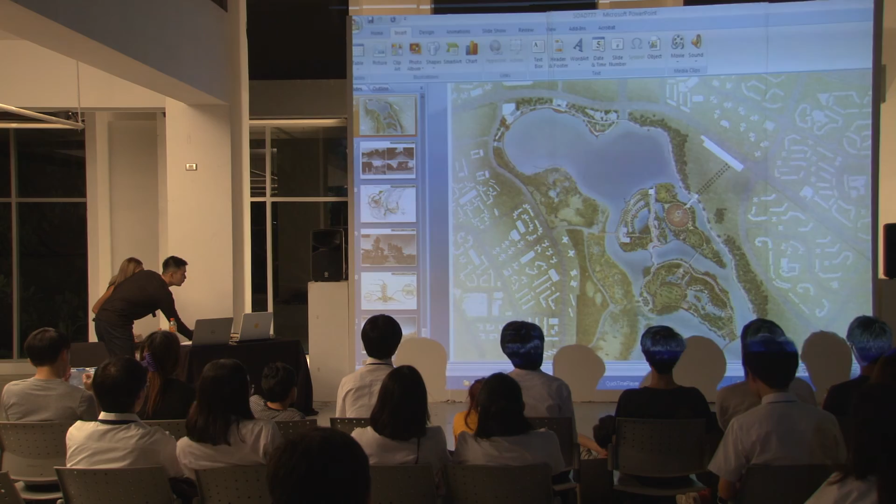Okay, this one we worked on together with the design firm from Japan, Nikken Sekkei. Because in Singapore, foreign architects need to work with a local architect, so our office was chosen by them. This one is also a competition design, and we got into the 6 shortlisted for this project already. But this outcome is the second stage.

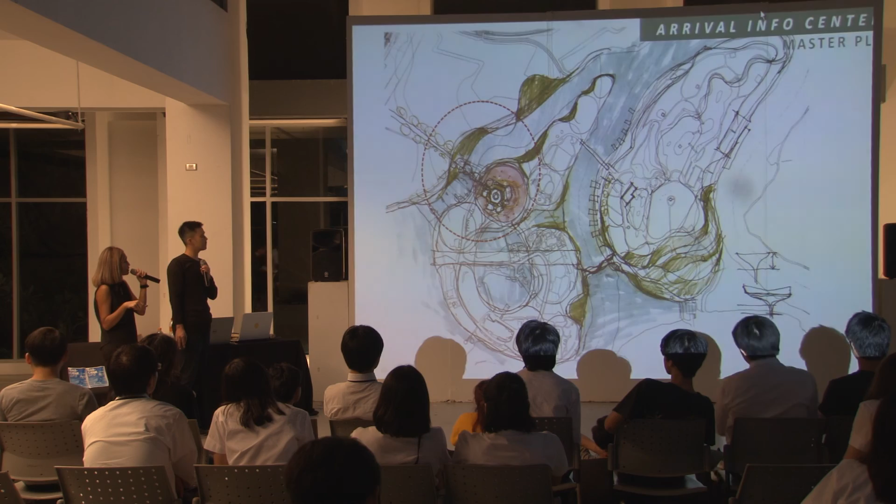And actually, we are the architect working together with the landscape design, so we try to help them develop some architectural parts. For example, this one is the existing building on the site. This is a Chinese garden in Singapore, quite famous as a public garden. And this is what we try to develop, the new experience of the entrance to the pagoda.